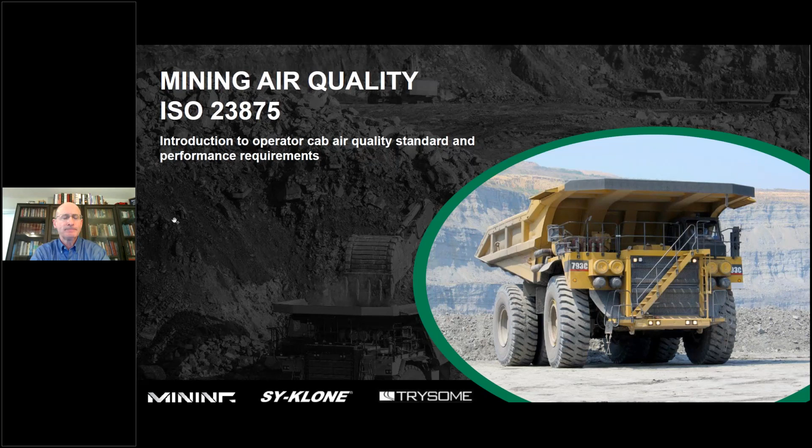So in the design phases, we have specific things that we are interested in doing. Laura, if you could advance to the next slide. In the areas that we are concerned with, we are looking at specific things which need to be addressed, and these areas are how we are going to address dust concentrations inside of an operator enclosure on an ongoing basis, how we're going to reduce and maintain at an acceptable level the CO2 concentrations which are inside of the cab, which are caused as a consequence of the operator breathing.

When in an enclosed cab, there's a limited amount of oxygen. That oxygen is consumed by the occupant, by the operator, and it's replaced by CO2. If fresh air is not coming into the cab continuously, then you see an increase in CO2 concentrations, which will be a problem for the operator if it's not addressed.

The other thing is, how do you know on an ongoing basis that the design is still working? So if you're at the factory and you put a design together, or if you're in an aftermarket situation where you've done an installation, one of the things we're concerned with is evaluating the cab, actually testing the cab's performance to ensure that the engineering control requirements, which are a part of the standard, have been correctly and fully implemented, and that they actually work on the machine. And then that translates into an ongoing maintenance of the machine and an ongoing opportunity to continue to performance test the machine in these various areas.

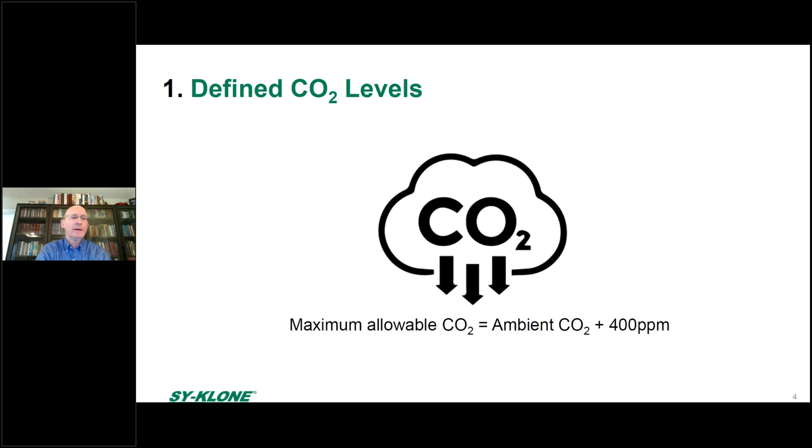Another one of the performance requirements in the standard has to do with, as we've already spoken to, recirculation efficiency. There is a performance requirement around this as well. The way that we know that we have the correct filters and that the cab is set up properly is that we run a very simple test where we introduce particulate into the cab and we turn on the recirculation system at a specific level of pressurization, and within 2 minutes the particulate levels in the cab have to fall below 25 micrograms per cubic meter.

Now, this is an amazing accomplishment from an engineering perspective, but also this level of particulate contamination in the cab will maintain the health of the operator at a very high level. This is a really positive and constructive aspect of the standard.

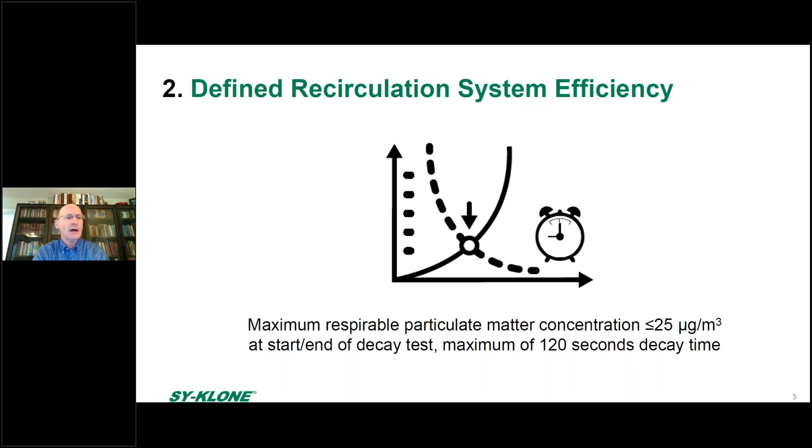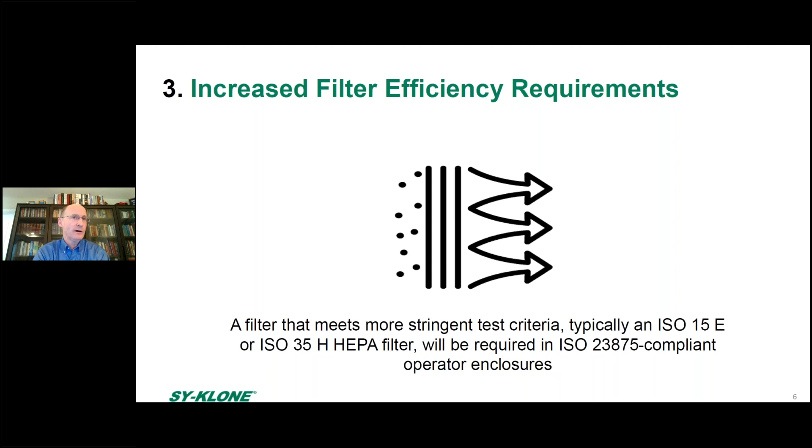Next slide, please. So we're not only defining recirculation system efficiency, but we're also defining what the intake air efficiency is. They are actually both the same. The filtration ISO standard that's been adopted under ISO 23875 has been around a while. We've adopted it because it's the most effective filtration manufacturing, testing and classification standard that is available, and it is now a part of ISO 23875.

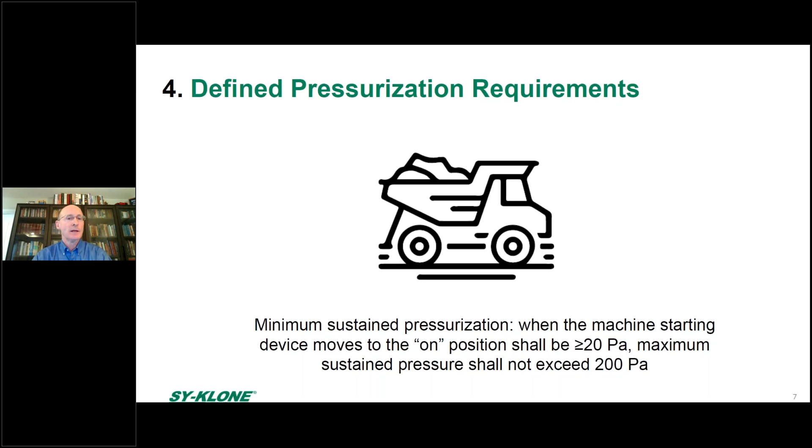Okay, so as it relates to cab pressurization, cab pressurization has been around for a long time, and many people know that cabs should be pressurized. We've defined what the minimum level of cab pressurization should be, and we've also defined the maximum level. What is new in this standard is that when the key is turned on and the electrical system is engaged, the cab must attain a minimum of 20 Pascal of pressurization, which means there's an active pressurization system on the cab such that when the key is turned on, it is actively protecting the operator by bringing in clean air and by not allowing other particles to come inside of the cab.

Next slide, please. And lastly, how do we know that all this is going on? We know this is all working because there's a monitoring system in the cab, which is monitoring the CO2 levels in real time, monitoring the pressurization in real time as well, and giving alerts to the operator when things are not doing what they're supposed to be doing. So this is a program which seeks to identify problems before they become long-standing problems.

We want to get to them early. We want to make sure that the maintenance requirements that are listed in the maintenance manual are performed, and that ongoing performance testing is done so that the cab is continuously being looked at and being monitored to make sure that its performance is consistent. And if we can accomplish these things throughout the life cycle of a machine, we don't allow the machines to degrade to the point where they can't be fixed.

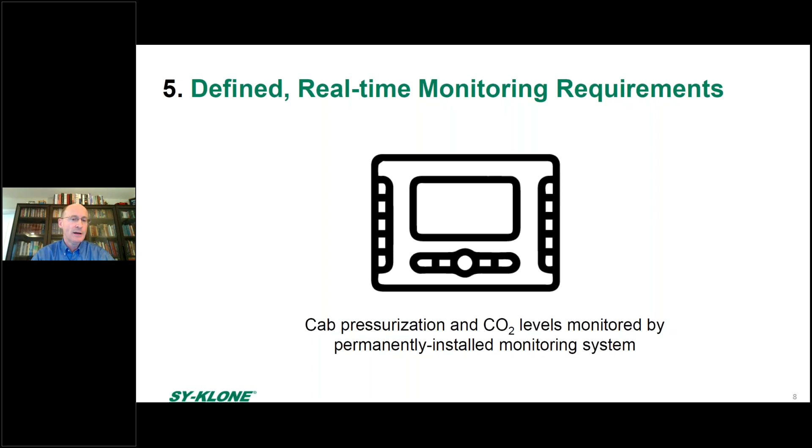They're continuously being scrutinized in the occupational health and safety management program in the site, and we have performance tests to validate that the cabs are working the way that they are designed to work. So all these things represent a huge leap forward as it relates to the protection of the operator and to making sure that the maintenance of the machine is consistent over the life of the machine. So this next slide, please.

So these are the 5 areas that have been addressed. There are engineering controls that are called out in the standard. I would encourage everyone to get a copy of the standard and to read it. I think you'll find it interesting from an educational perspective. I think that you'll find it interesting in terms of the areas that are covered by the standard. There are new things referenced in here, including an annex which addresses the industrial hygiene and occupational health and safety aspects of the standard. It is designed to be educational.

We do understand that there's a lot to the standard. It's not just what happens at the factory in the original design. The standard addresses what goes on with the retrofit side, what happens at the factory, what happens in the maintenance shop, what happens on the industrial hygiene, and on the administrative end of the cab throughout the life cycle of the machine. So we're very excited that we've had an opportunity to get an international consensus.

This passed unanimously on the international balloting. It was formally adopted and published on February 22nd of this year. And we're very excited not only that it exists, but also that we're having an opportunity to present it to you today. Thank you, Laura.

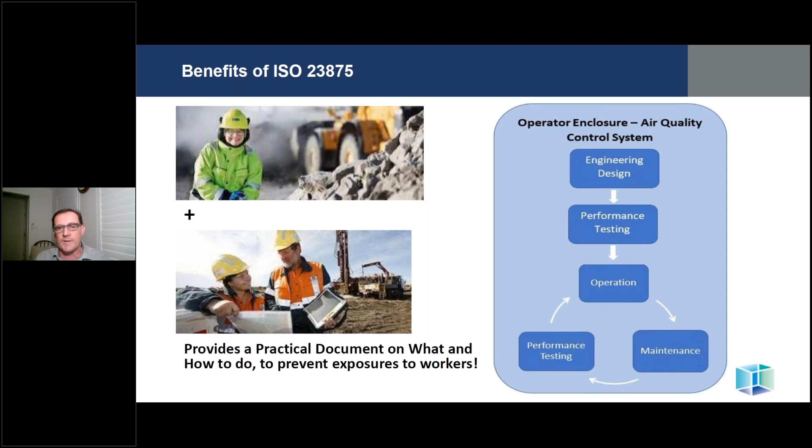Continuing around benefits of the standard, and particularly around the worker health aspect. It provides a criteria which will protect worker health. For example, as has already been touched on, there are filter requirements, there's airflow, there's pressure, there's specific CO2 levels that are required. One contributor to alertness is CO2 levels. So the inclusion of the CO2 requirement and the real-time monitoring assists the operator alertness and the potential to reduce

fatigue-related events. Look, just to be clear, I'm not saying that this is a solution to fatigue. There are many factors in causing fatigue, the main one being the lack of sleep. However, CO2 is a contributor to this, and having this continual monitoring of that and being able to alert the operator if the levels aren't within the required levels is a significant way of being able to manage that risk and the potential for an event.

Look, the filtration requirements protect the worker from dust exposures and in preventing the long-term dust-related occupational diseases. So, for example, pneumoconiosis or silicosis related to silica dust exposure. This standard is a very real, practical way that companies can demonstrate their values and their care for workers in preventing exposure and managing risk.

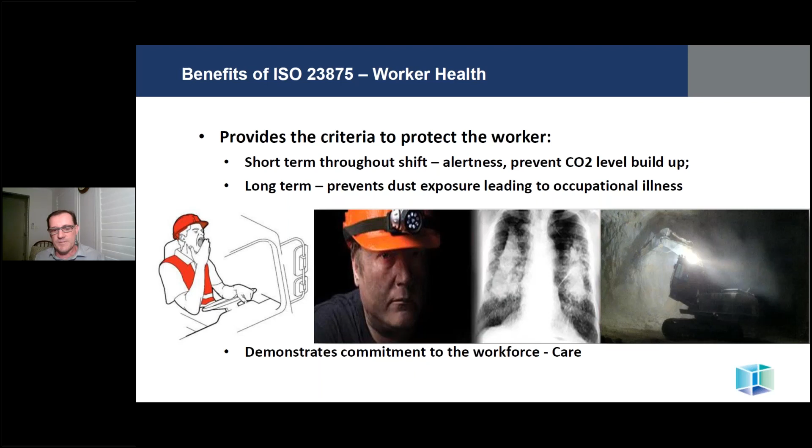What is the role for the occupational or the industrial hygienist in adopting, implementing and testing in regard to the standard? So in terms of our role as a hygiene professional, from an industry perspective, our role is to promote and inform the occupational hygiene and industrial community. And that role is to inform them on the standard itself, the benefits, and how it focuses on the prevention of exposures and worker protection.

Examples of this can be the South African Institute of Occupational Hygiene, the International Council for Mining and Metals, the ICMM, the Minerals Council of South Africa, and the Mining Industry Association of South Africa. So the more that we can work with those bodies and promote this standard and provide that education, the greater opportunity we have to protect worker health.

From an organisational perspective or a business, our role is to be the subject matter expert, to support and work with the operations and the maintenance teams. So to coach them, to provide some training on implementing and testing according to the standard. And overall, it's also to support the broader business to manage the dust exposure and to show the real benefits to the business that this standard can bring. Next slide, please.

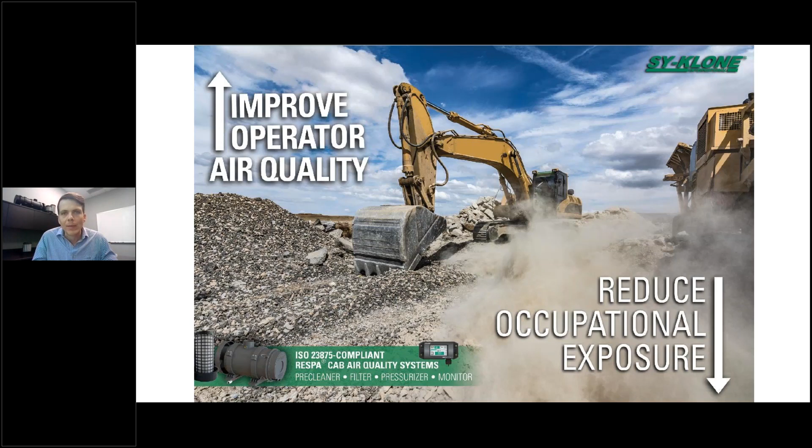So now that you've heard all of the different performance and engineering requirements, you may be asking yourself, well, how do I do this practically at my job site? So Laura, if you turn to the next slide, you'll see that Sy-Klone has been specializing in how to do that for the last 30 years.

For the last 30 years, we have developed clean air solutions for the most extreme debris-laden job sites around the world. With over 100 patents in the clean air space, including pre-cleaning, air filtration, and pressurization, we have developed a specialty of working with customers around the globe, like many of you, to address the most complex and demanding clean air challenges. As Liam mentioned, one of the biggest focuses has to be on prevention versus reaction.

And so through working with local experts such as Trisum Automotive, we're helping mine sites and other industrial job sites to deliver prevention solutions which positively impact outcomes, including both short-term controls, such as the alerts in the real-time cab monitor system that we'll go over a little bit later, but also long-term impacting exposure and supporting reduction targets and improving the long-term health outcomes through reduced exposure to respirable particulate.

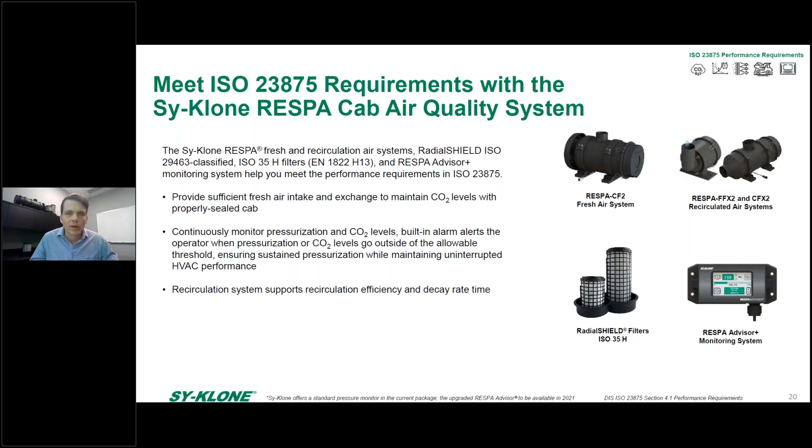Over the next several slides, we're going to walk through step by step on how to meet the performance requirements that Jeff and Liam have outlined. If you look in the top right-hand corner, you'll see the 5 key performance requirements outlined and how they connect to each step. So the first item that we'll look at is fresh air system. So fresh air intake is critical to maintaining a safe operator environment.

Sufficient fresh air entering the cab dilutes increased CO2, which allows an operator to stay mentally clear and aware of their surroundings. High levels of CO2 in the cab can result in operator fatigue and loss of operator alertness. Operator fatigue is one of the major contributors of near misses and preventable workplace incidents on job sites. And so by ensuring a clean, fresh, sufficient, sustained amount of air coming into the cab, it dilutes not only CO2 caused by the operator, but it also ensures that it provides clean air free of dust and particulate.

So when evaluating a fresh air system, it's really important that you find a pre-cleaner, pressurizer, and filtration system that's able to do all 3 of these items. The pre-cleaner allows you to really clean out the largest dust and debris before it ever reaches the filter. The pressurizer ensures that the cab becomes a pressurized environment, keeping dust, respirable particulate, nanoparticles on the outside of the cab and prevents it from getting to the inside of the cab where it can be breathed in by the operator and/or affect the technical controls or other air conditioning components.

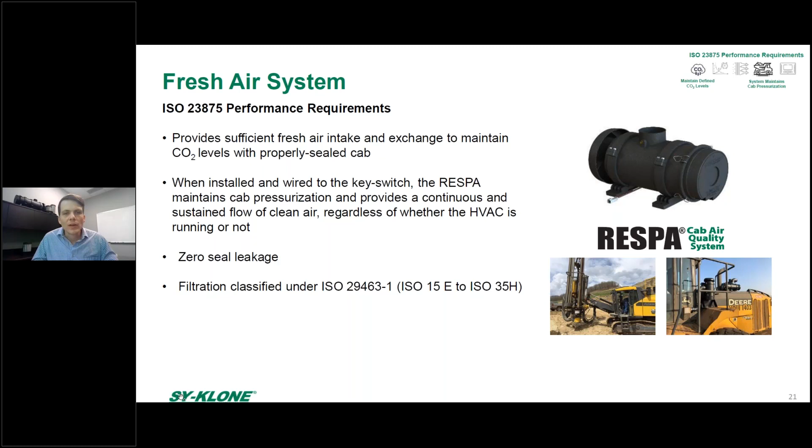And then the third component of a fresh air system that you need to ensure is high efficiency filtration. We'll review it more thoroughly, but not all filters are created equal, and you need to ensure that you have a HEPA filter that's designed for human respiration. So as you'll see on the next slide, fresh air is one component to ensure that you get fresh air in the cabin, but it's just as important to ensure that the air inside the cabin stays clean throughout the course of the shift and overall throughout the entire workday.

So some people might ask, if air comes in clean, well, how does respirable particulate get in? So as an operator opens a door throughout their shift, they bring in dust, debris, and things on their boots or on their clothing. You can actually see spikes in respirable particulate above the permissible level. A high quality recirculation system allows you to recover the air quality quickly and get it back below the permissible exposure limits when combined with a high efficiency filter and a proper fresh air system.

The operator cab, when equipped with the right fresh air and recirculated system, is one of the most cost-effective ways to maintain PEL on industrial work sites around the globe. And at the end of the day, many OEM recirculation filters are not able to get you where you need to be from a decay rate, which is how long it takes you to recover from a spike in respirable particulate. And that's why you have to look at a high efficiency recirculation filter and recirculation system.

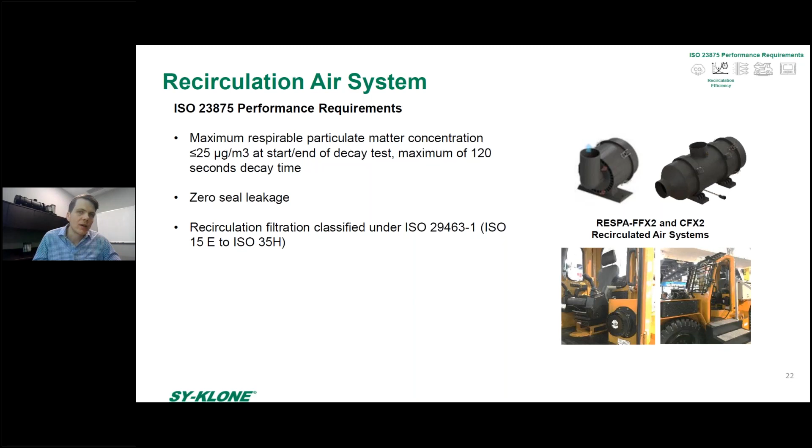So we've talked a lot about filters, both on the fresh air and the recirc. On the next slide, you'll actually see what are some of the specifications that you need to look for as you are purchasing filters for your job site.

So one of the increased performance requirements of ISO 23875 is defining new efficiency levels. ISO 29463 measures filter efficiency by the most penetrating particle size, which at the end of the day is the particle size that can make its way through the filter and downstream. So the smaller the number, the better.

One of the big misconceptions in the marketplace is that all HEPA filters are created equal. There's a big misconception that in order for something to be called a HEPA filter, it has to be 99.97% effective at a 0.3 micron size. This is in fact not an industry standard at all. The new industry standard is focused on MPPS, and so the difference between the old and the new is the difference between boulders and BBs. So it's really important that you look for and understand the classification of the filter that's coming on site.

The other thing to understand and really look for is, from a control and prevention standpoint, new filters are able to capture smaller and smaller nanoparticles. The new Sy-Klone filters released in the summer of 2020 from a HEPA perspective are able to arrest 99.995% of COVID-19 sized particles, as well as influenza particles. So it is a strong safety control and measure for not only 23875 compliance, but also health.

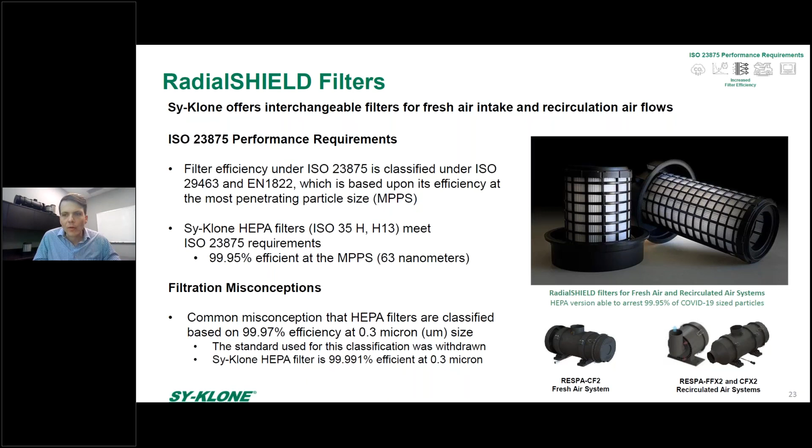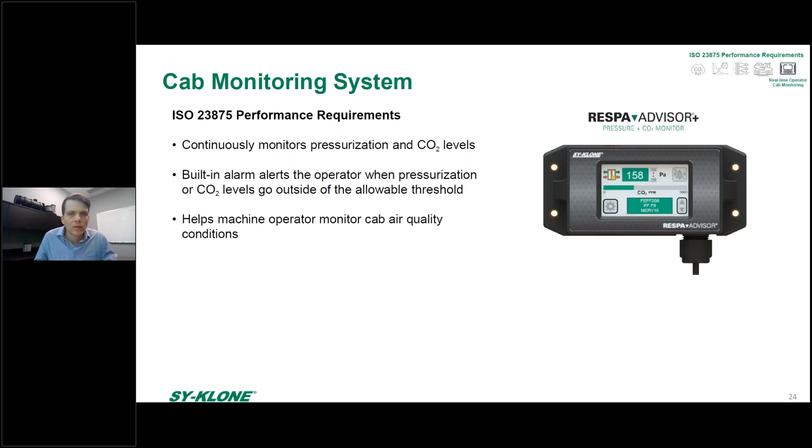Before we go to Q&A, I did want to share two case studies. So if we'll advance two slides forward, I wanted to share these specific applications in real-world environments. The first case study is at an ore mine site that was facing a really serious fibrous substance, specifically asbestos, as well as silica exposure. We worked with the industrial hygienist, operations leadership, and fleet maintenance supervisors to equip one down-the-hole drill with the Sy-Klone RESPA fresh air and recirculation system. From there, we were able to compare it to a drill that had the standard OEM AC system.

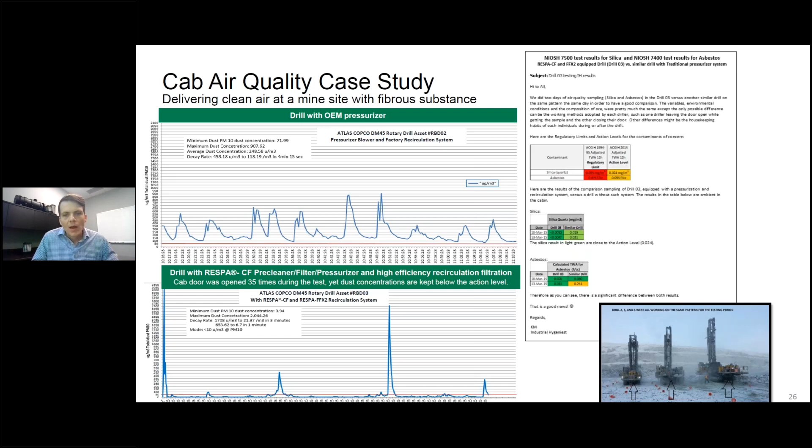And so as we can see, the real-world application of the Sy-Klone products allowed industrial hygienists, operations leads, and fleet maintenance supervisors to really drive towards a common goal of not only protecting operators, but also improving maintenance intervals and improving productivity. So now we're going to turn it over to Q&A.

Thank you so much, Austin.

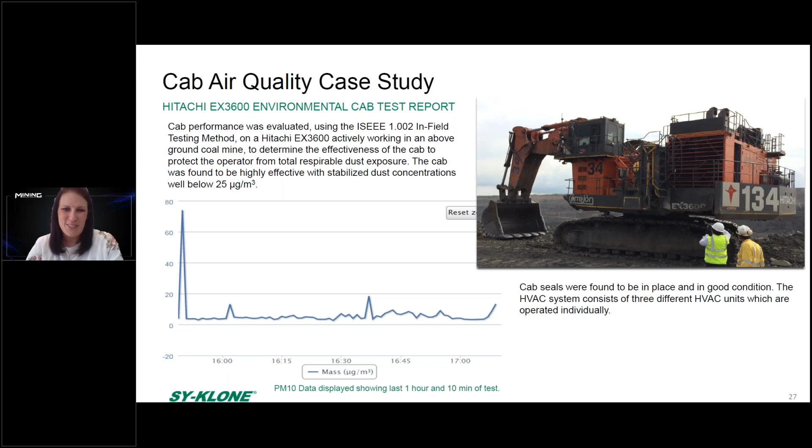Before we do our Q&A, I'm going to ask our audience to do a second poll with us. It is particularly interesting in light of our first poll question, which was asking if you are familiar with the standard. 38% of the audience said that they are not at all familiar with the standard, and another 20% said they are only somewhat familiar. So we've had a lot of insightful information provided by our panel about the standard, which has been informative and

valuable. So our second poll is therefore asking, how likely are you to institute ISO 23875 on your work site? Not at all likely, somewhat likely, likely, or very likely. I think a great question in light of the information that our panel has shared with us today.

So please do participate in this particular poll. It'll give us great insight as to how you feel about the information that has been shared with you through our panel of experts. Again, we'll leave the poll up on the screen for a few more seconds so that you can review your answers and participate.

Super, thanks very much. I would now like to invite the rest of the panel back onto screen. Eddie, for yourself as well, please do join me.